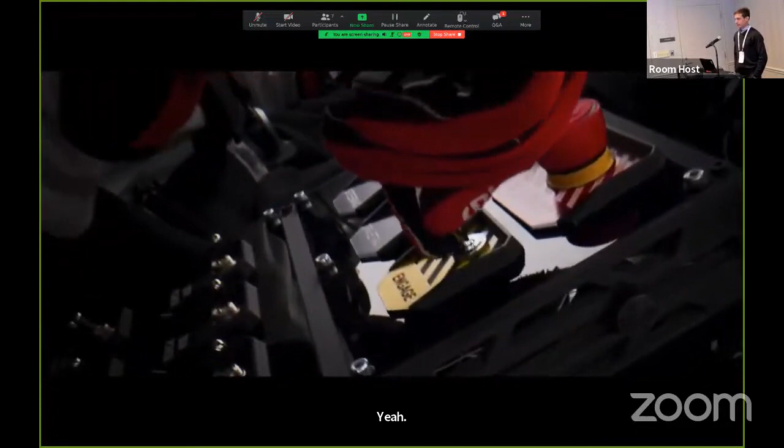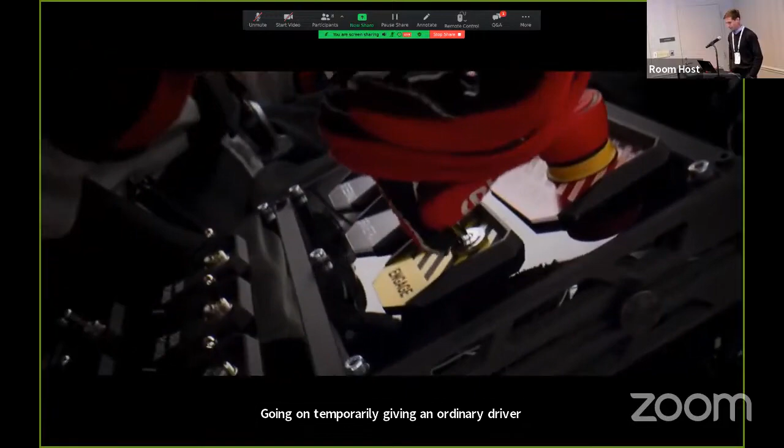John, you're good to go. Going autonomous. Whenever you're ready. Temporarily giving an ordinary driver the drifting skills of an expert. Great run.

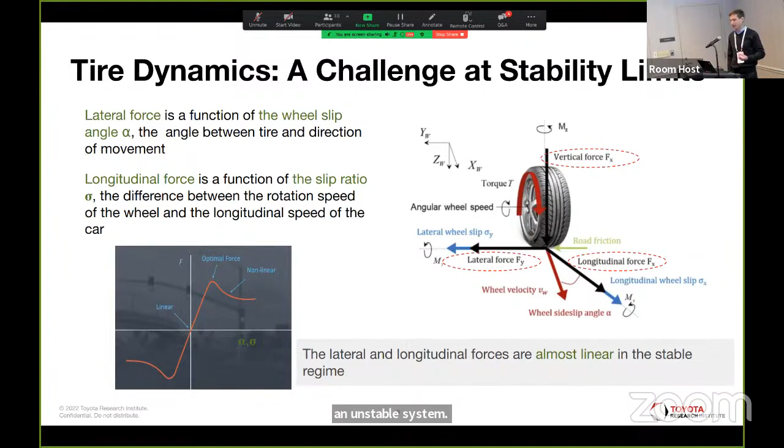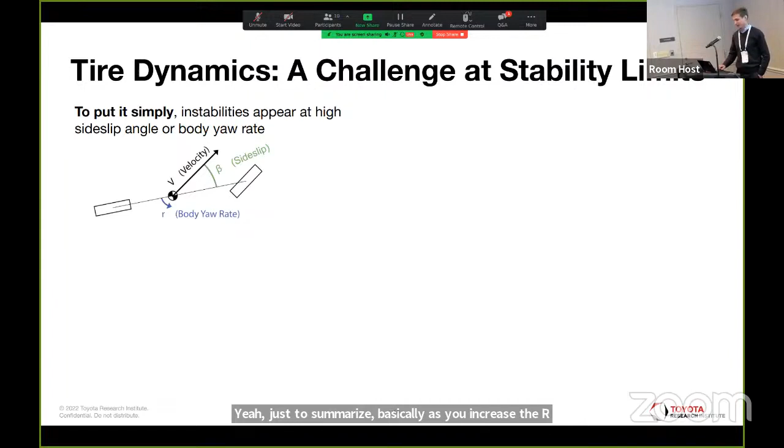But yeah, just to summarize, basically, as you increase the yaw rate of the vehicle or the side slip angle in drifting, the vehicle becomes increasingly unstable. However, it's actually quite hard to model the tire's behavior out in this regime because of a number of factors: aging and tire wear, complex coupling between the longitudinal slip, and between the suspension dynamics and the behavior of the vehicle.

So here, previously, we saw a pure slip cornering case. Here we see a purely longitudinal case. So something to think about is existing models fit the tires only, but still require all sorts of inputs from the vehicle dynamics. So these could include things like normal loads and suspension kinematics. However, in practice, when we're designing controllers for autonomous vehicles, we don't necessarily have access to all of this information.

So what this work does is effectively develop a tire model that is able to incorporate some of this information and understand how that correlates with the resulting tire forces. So in practice, what we've done here is learn a relationship between the lateral and longitudinal forces in relation to the lateral slip alpha, longitudinal slip sigma, and then the three vehicle states R, V, and beta.

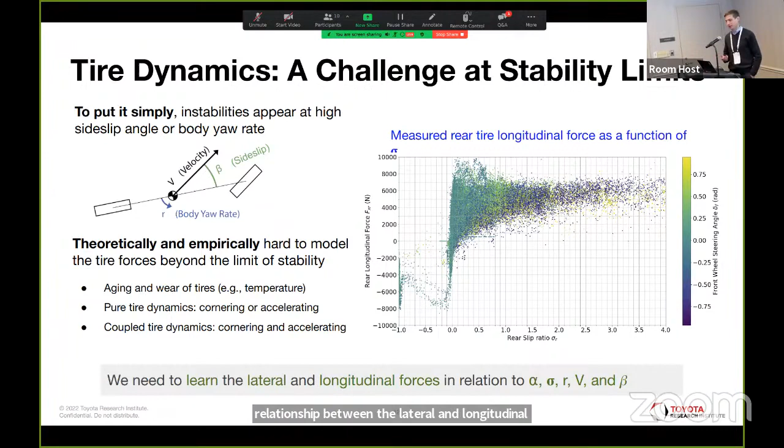So you might think that if we want to model this relationship as accurately as possible, well, we should choose a neural net and train it through supervised learning, right? It's a simple regression task. Let's build a tire model from the data we've collected, since we do, in fact, have a pretty good idea of what the tire forces are because we know the vehicle's mass and we can measure its acceleration. That looks a little something like this.

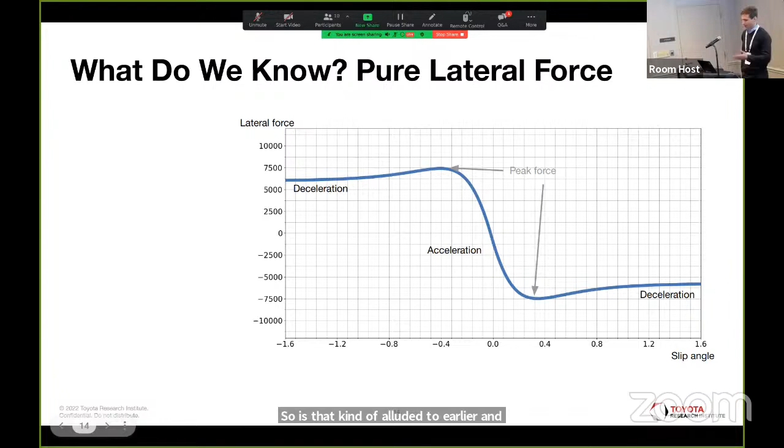Instead, we'll find a way to incorporate some of our physics knowledge and some of our empirical expectations about how tire models behave into our model. So as I alluded to earlier, and we'll touch on in a little bit more detail, what we expect in the pure lateral case, which is the simpler of the two, although the combined slip case is roughly analogous, we would expect this characteristic shape in which there's a pronounced steep peak around the origin, and then these plateau-esque regions.

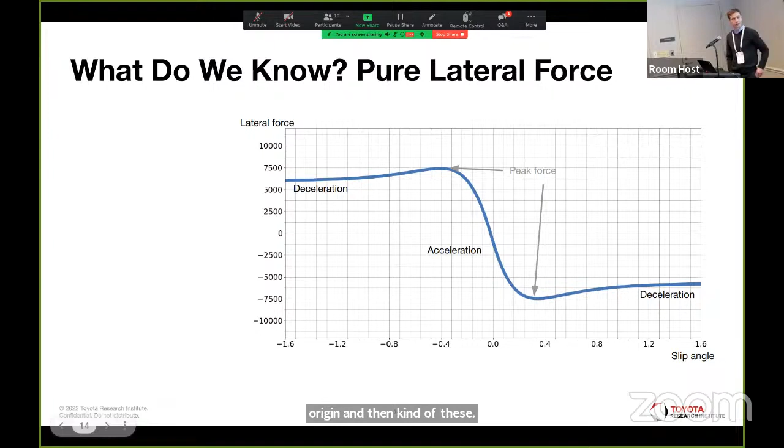So to make this a little bit more formal mathematically, what you effectively would expect is some sort of convex shape at the extreme negative slip, concave shape transitioning to a convex shape around zero slip, followed by a concave shape at very high positive slip ratios. So effectively, we're tracing the tire curve from left to right.

One other useful feature might be the ability to control the peak height. So we want a tire model that fits the data well, but at the same time, we want one with the lowest possible peak force estimate. So this allows us to be conservative in estimating the tire's capabilities based on the data we've seen.

Okay, so how do we actually incorporate some of that knowledge into our tire model? Well, the approach we've pursued is based on a neural ODE model. What we've done is we've used a neural network that effectively describes a function which we can then integrate twice to get our tire model.

So when we're training the neural network, we produce effectively this function g, which then we can integrate twice to get f, and then we can compute our loss function. Because of the way we've constructed and framed this, we know that the function f, our effective tire model, has the required characteristics. We can then train as you typically would in any sort of supervised loss setting. At the same time, we can also enforce two soft constraints on the peak tire forces.

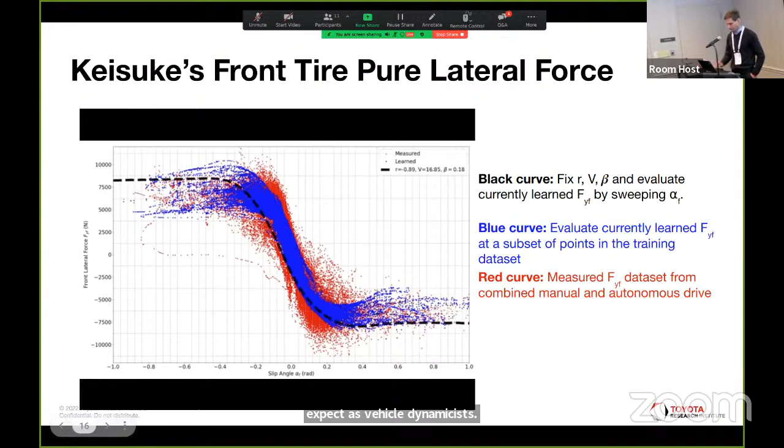All right, so this model has a lot of our desired characteristics. It's relatively data efficient, it generalizes, and if we train a distilled version, we can actually apply this on the car. However, they are somewhat difficult to tune in practice because you have to ask yourself, what should the step size be? And what range of alpha do you actually want to enforce these constraints over?

So instead, we decided to pursue another solution where we actually limit the expressivity of our model to a class of functions which we know has these desired tire characteristics. So rather than sampling from all possible functions which have these desired properties, we'll choose just one and then parameterize that with a set of neural networks. And that looks a little something like this. We've called this the exponential tanh tire model.

Here, the functional form is at the bottom, and it's dependent on these 5 parameters A. We can then learn these. In addition to this smooth curve that is helpful for our optimization algorithms, we can also directly intuit the maximum and minimum of the tire model, which is very useful in predicting the vehicle's limits.

Then, to leverage the data that we have to fit these models effectively and keep that model accurate as the vehicle is operating over its full state space, we make these parameters A functions of a neural network. Again, just as we saw in the neural ODE case, the inputs to the model are our 3 vehicle states. As before, the supervised learning problem looks quite similar. Over our data set, we want to minimize the loss, that is the prediction accuracy of our tire model. And at the same time, we want to be able to enforce some prior belief we have on what the peak tire force is.

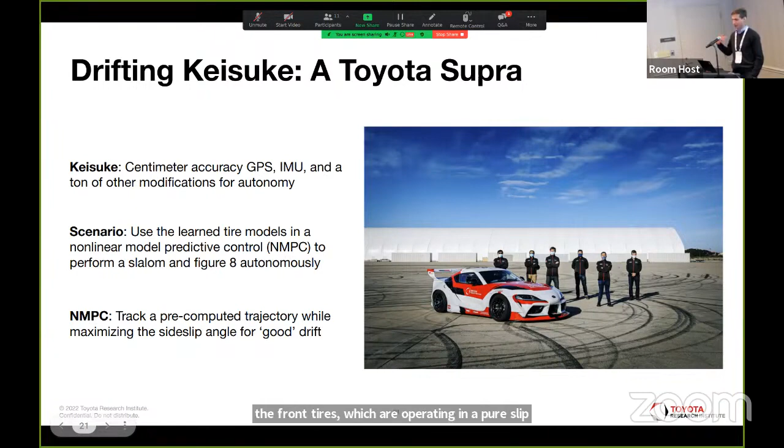In the following tests, we'll effectively do a direct swap for the tire model within our vehicle dynamics model. So the Fiala model will come out, and the two learned models will go in instead. And this will be used both for the front tires, which are operating in a pure slip condition, and the rear tires, which are operating in this complex coupled slip regime while drifting. Then we'll run some back-to-back tests. So this data here actually shows the same trajectory we saw in the opening video from my talk.

As you can compare, the top plot here is the lateral error, so effectively how well we're tracking our desired path. You can see that the Fiala model in orange generally, the worst case average deviation is 2 meters. However, the two learned neural networks actually do substantially better in this regard. This is important because, as a controls engineer, one of the first things you want to be able to do, even when driving at the limits, is put the car where you want it.

Maybe less apparent than in the path tracking, but the next plot down shows our side slip tracking accuracy, so how well we're able to control the degree to which the car gets sideways. And then the third plot shows probably the most important qualitative quantity when you're operating the vehicle, and that's the smoothness of steering. So we want to be able to produce steering commands that we can reliably track with our servo mechanisms on the actual hardware. So anything we can do to slow that down improves our low-level tracking performance and shows a degree of finesse and control in the vehicle.

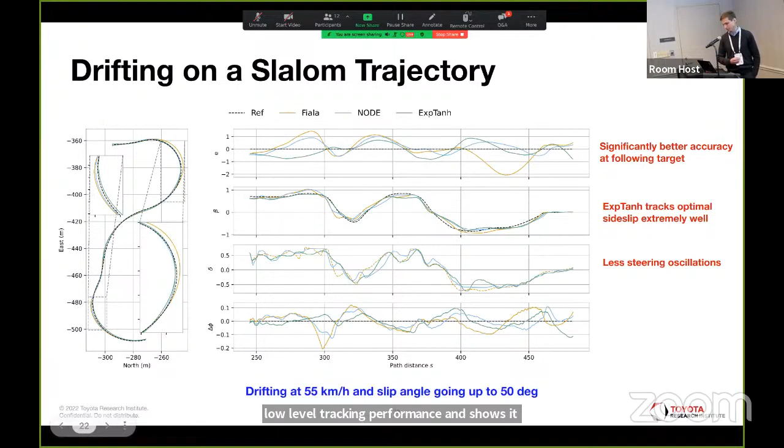However, due to the model-based nature of our control, we don't just learn models that work well in one scenario. By its very nature, the nonlinear model predictive control framework transitions well to different scenarios. So here, we'll see how it performs on a figure-8 trajectory. I also like this video because it really drives home the idea of transitioning rapidly from drift to the left and to the right.

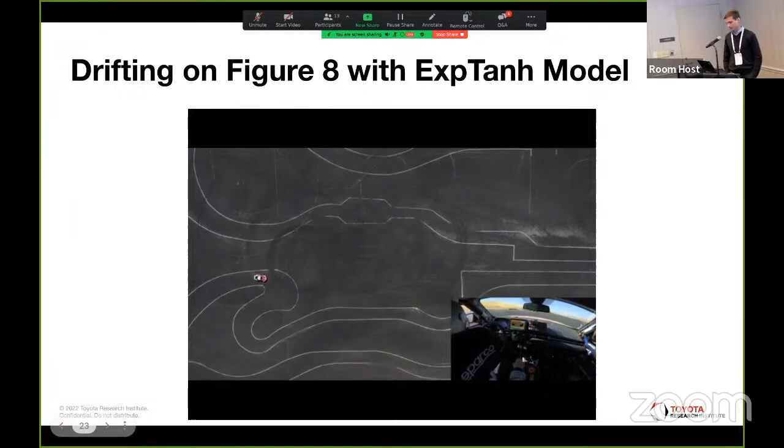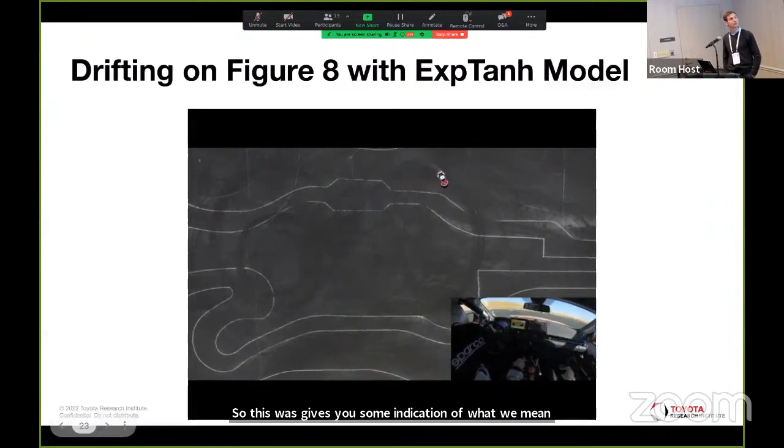If you look closely, you may be able to note the tire marks made by the vehicle over repeated tests. So this gives you some indication of what we mean when we talk about path tracking accuracy. Note, however, that there is more than one figure-8 drawn on the skid pad.

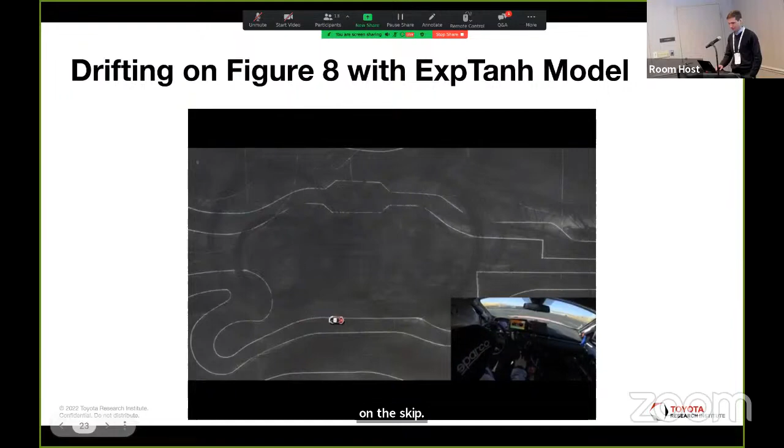So perhaps even more apparent in the figure-8 data than in the slalom trajectory we saw in the previous example, our learned exponential tanh tire model significantly improves the lateral tracking accuracy. So whereas there's a persistent offset in the Fiala model's experiments, that is effectively much reduced when we're working with the exponential tanh model.

Similarly, when we're operating in the tricky coupled slip region, so this is actually at the end of the test, we're exiting drift and returning to straight ahead driving. We can predict the states more accurately, leading to smoother steering inputs and better side slip tracking over this part of the trajectory.

Finally, an additional benefit to using these more accurate tire models for control is that when we make the rapid transitions from drifts to the left and right and vice versa in the figure 8, we see less overshoot in the side slip response. This is important because this is actually the region in this trajectory, at least, when you're most likely to spin out. So anything you can do to predict this behavior accurately means that you can transition to your new target point quickly and safely.

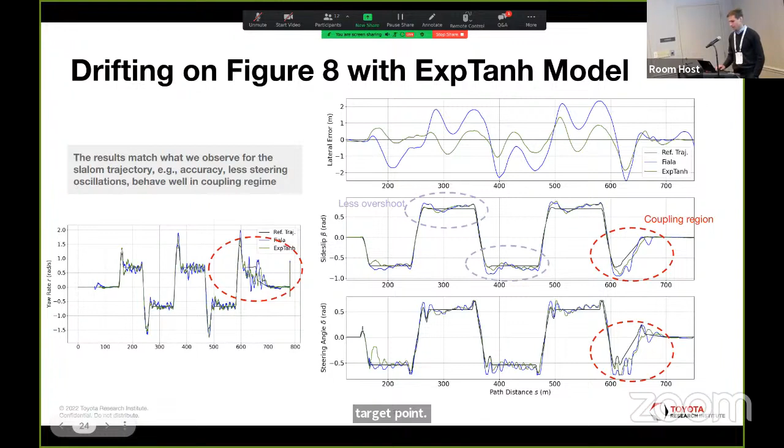Okay, so that will kind of conclude the sampling of the drift work that I want to present and kind of wraps up how we've used some machine learning techniques in actual on-vehicle control with real hardware. Now I'm going to change gears a little bit and talk some about some of our work for driver modeling for motorsports. And I'd like to recognize my collaborators on this work, Jenna Lee, Sean Manuel, and Paul Tylkin.

All right, so to begin with the question, what do we mean when we talk about driver modeling? Well, our goal here is to predict how a human driver will react and drive in a given situation. However, this situation could be problem specific. So for example, if we're modeling a racing driver in the context of racing, some things we might want would be, as human drivers do, we want to be able to drive the vehicle very near its absolute performance potential.

So we need to be able to extract everything out of the tires, kind of as I described in the previous work. However, importantly for this work, since the goal was to use these driver models to actually help optimize vehicle setup in simulation, the driver model needs to be able to adapt its driving to changes in the vehicle setup. So as the vehicle's limits change, the policy needs to adapt in such a way that it's still able to get the best performance out of the vehicle.

Finally, two other requirements are that one, we may want to be able to emulate the specific style of a driver, at least when we have demonstrations of their driving available. However, an additional requirement that was given to us at the same time was that we still need a driver model that performs well when no such demonstrations are available.

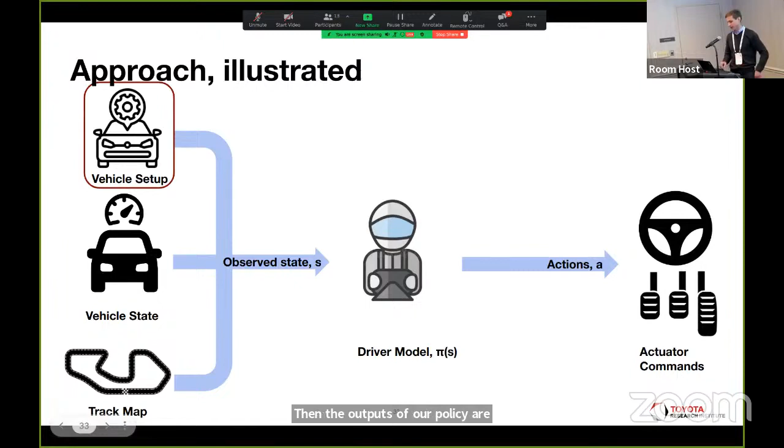Really quickly, I'd like to introduce two notions of imitation when we talk about imitating human drivers. The first would be taking the same action as a human driver was observed to in a given state. And we found that we can actually do this pretty easily by augmenting the policy update with a simple behavioral cloning loss. Perhaps more important, especially as the vehicle setup changes, is that we want to be able to visit the same states. However, we can't use all states for this, because as the vehicle's performance limits change, you may use the same racing line, but you may have to drive faster or slower to get the best performance out of the car.

So in this case, the incentive was really just to use the same racing line. And we found empirically that the second goal actually helps us improve lap time slightly, as we'll see in the following example, while the first goal had a small negative impact on lap time.

All right, to bring me to the experimental results of this work, what we did was we just devised a kind of a battery of 4 different tests. So each of these are a high fidelity multi-body simulation model of the Lexus RCF GT3 car driven around Fuji Speedway. We gave these 4 setups to a professional human driver and had them set the best time they could in a motion simulator. So high fidelity motion base, surround screen, all that good stuff.

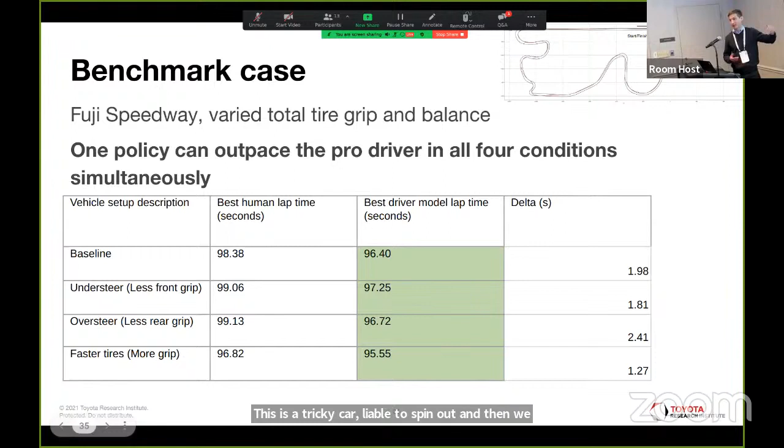So this next couple plots, we'll see how the agent actually adapts its driving to these various setups. And maybe for context, let me just give you a little bit more on how these setups were devised. So we have a baseline, and then an understeer setup where you'll have effectively less peak tire front grip. So this is a stable car, easy to drive, but not as fast. Oversteer, where you have less rear grip. This is a tricky car, liable to spin out. And then we effectively have just the baseline setup, but with an equal increase in grip compared to each of the 2 cases.

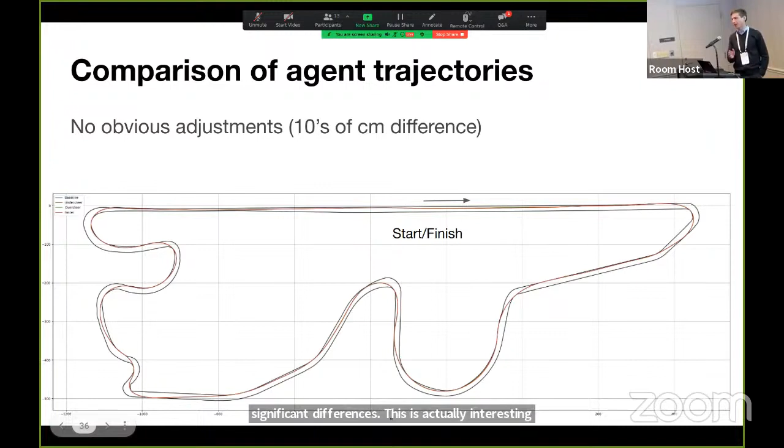So comparing the 4 trajectories, we don't see significant differences across the whole lap. So this is actually interesting, and I think, depending on who you ask, may or may not be consistent with what human drivers do. I think more interestingly is that most of the difference in lap time actually comes from differences in the driven speed. And importantly, for the use of consistent exploitation of the vehicle's performance potential, we found that these speed traces don't really cross. When you're driving the setup that we expect to be fastest, because it has the most grip, it is in fact fastest everywhere.

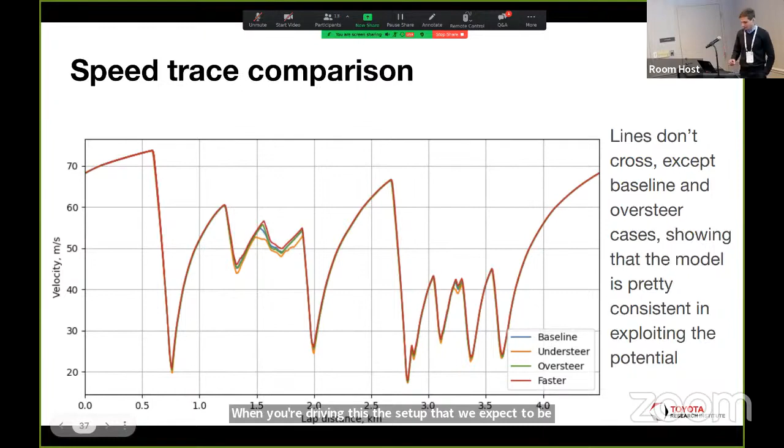Similarly, much like human drivers, the steering inputs that are actually made to the car differ. So in green, we see the oversteer case, and we see these necessary corrections that are used to maintain directional stability of the car. They're here. These are these kind of downward spikes as the driver model straightens the wheel to avoid a spin out.

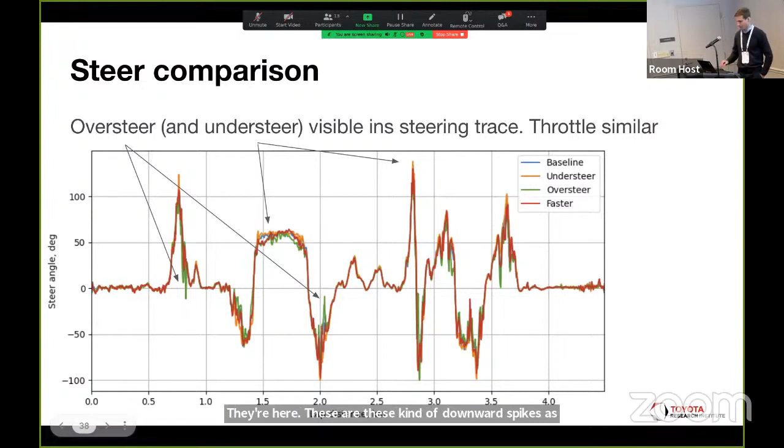Okay, so I'll conclude with a video. This is a simple animation of the trajectories driven by the human driver and by the driver model in two settings. So the human is in green, you'll see a population of their laps, and then you'll see in blue our RL agent that was trained without any knowledge of the human behavior. On top of that, you'll see a red agent, which is, in addition to the cost function I described earlier, incentivized to use a racing line close to the average of the human demonstrations.

This is playing in real time, so the lap time is about 1.5 minutes. So as you come down the main straightaway at Fuji, it's one of the longest in the world from what I understand. You brake for the first corner, and you can already see slight differences in the racing line used by the human and the various agents.

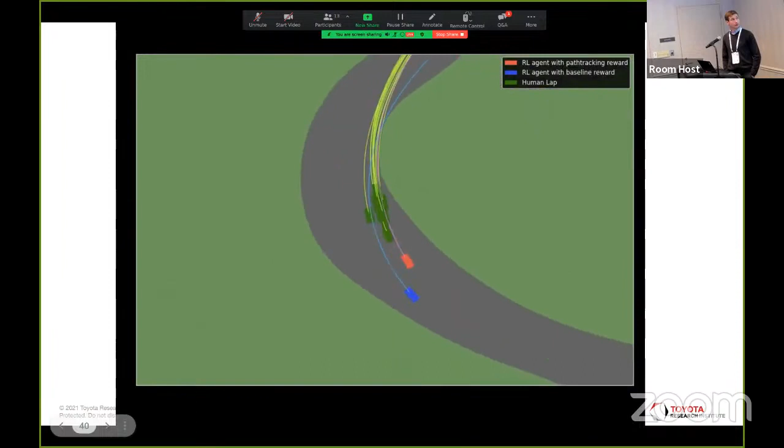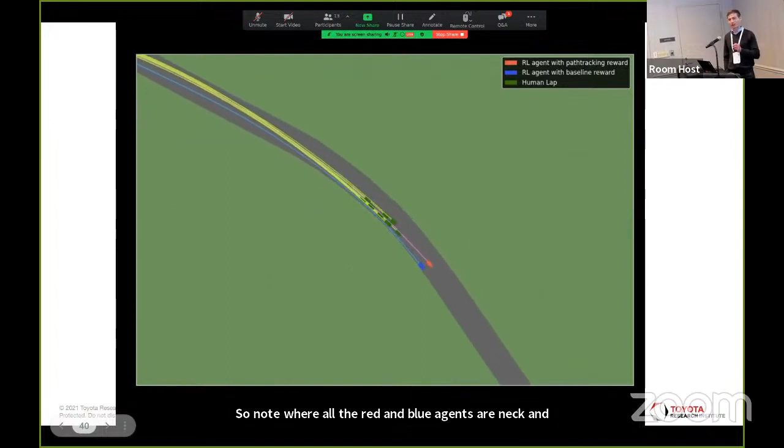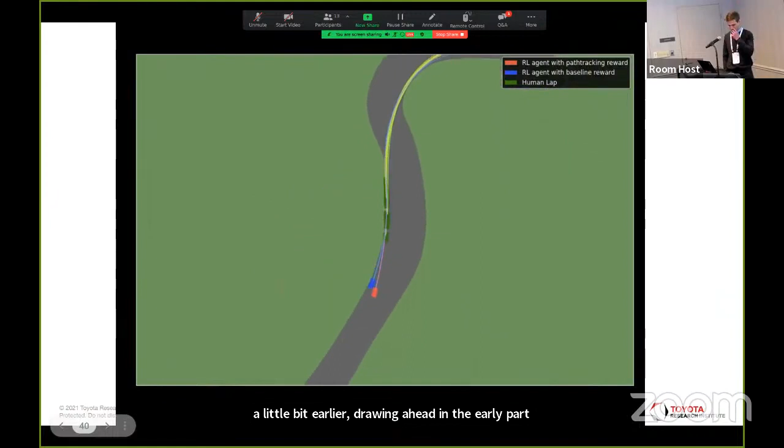So note while the red and blue agents are neck and neck at this point, they generally take different approaches to each corner, with the blue agent diving in a little bit earlier, drawing ahead in the early part of the trajectory, only to give most of that gain back in the latter part of the corner. Note too how the path of the red agent is pretty close to the center of the human lap distribution.

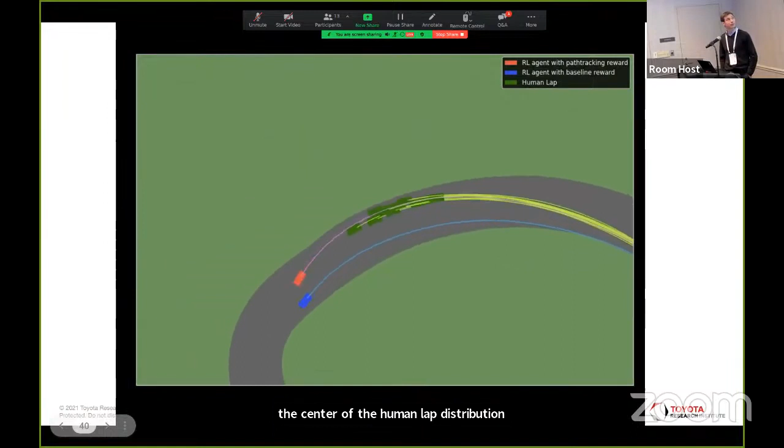We're coming into the last corner, blue is ahead, but red takes the day with superior exit speed onto the final straight.

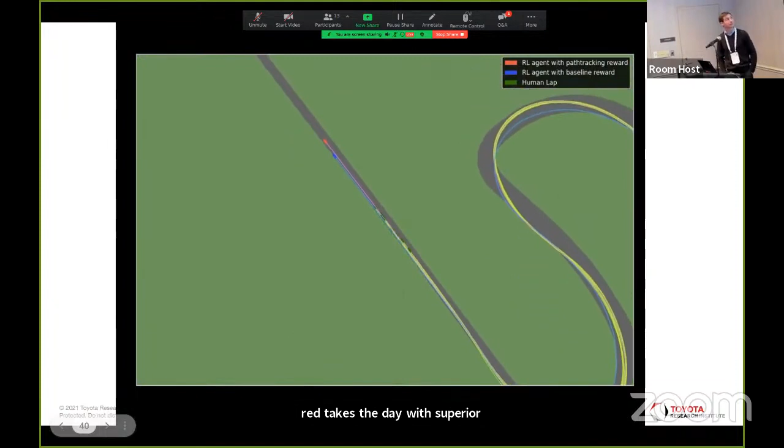So I think what we can take away from this is that humans, as impressive as what the RL agent can do in terms of vehicle control, humans really do have better insight into what it means to take the best racing lines.

I will acknowledge here quickly that there could be a few things the RL agent is exploiting. Since this is simulation, where human drivers are very good, it is not the same as the real world environment where they spend most of their time. So our agent could be exploiting something that the human driver isn't willing to do in the real world, and so is therefore not willing to do in the sim.

Okay, I'd like to conclude my talk with just two final thoughts for you. The first is that whether through model-based control, as we saw in the MPC work, or the model-free reinforcement learning, ML has a lot to offer us in the study of high-performance driving. However, we've found, whether through incorporating side information into the tire model or human demonstrations into the driver model, incorporating expert knowledge is in fact key to getting the best results.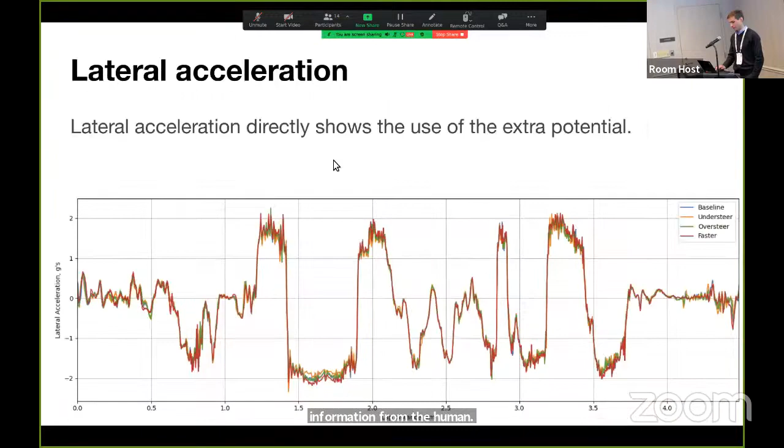Yeah, thanks for the talk, John. I forget if it was the red or the blue that incorporated the racing line information from the human. Are there any other ways that you've been looking at incorporating information from what the human did? For example, I assume that doesn't have the velocity information or the steering information. It's just the trajectory, is that right? And is that generally the best thing?

Is that generally the biggest help we can give the model, or are there other aspects we can give? And just to follow up, did that help training time? Was it fewer iterations to get to a good policy with the hint of what constitutes good racing?

Yeah, two fantastic questions. I'll start with the second because it's slightly easier to answer. Yes, we found it did improve training performance to get to a certain level. However, at best this is somewhat less than a factor of 2 improvement. So it wasn't necessarily a tenfold increase.

In terms of future explorations, if we were to continue heavily with this work, other things we might look at incorporating: we've looked with some success at incentivizing exploration around the human trajectories, even very simple potential-based reward shaping. We have some initial experiments that suggest this works well when you have at least one human demonstration. You don't necessarily get the behavior we observed where the agent will follow the human racing line, but where it's beneficial, it does leverage that.

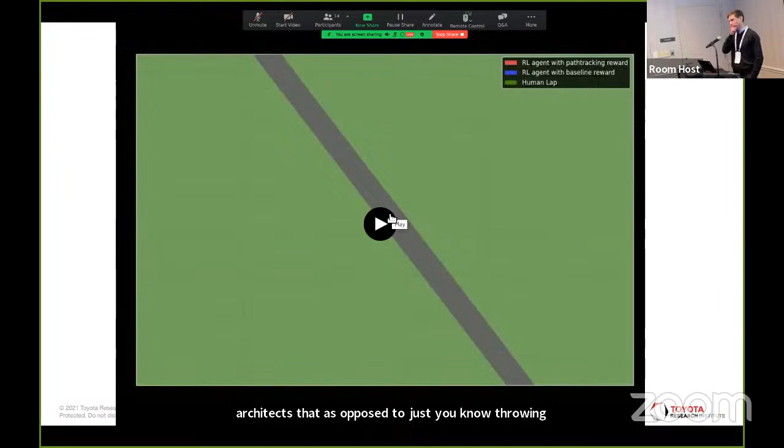Yeah, and related to that, beyond the humans themselves, is there any other kind of priors we can put in? So in the first part of your talk, you were talking about these neural ODEs, that the way in which you architect that, as opposed to just throwing a fully connected network at it, really helped it out. Beyond second order ODEs, is there any other interesting prior information, again, not necessarily to do with human racing, but more to do with physics, that could help out the training?

Yeah, I think I'll answer the question in 2 parts. I think we have a pretty good idea from vehicle dynamics about how to select the state information to make available to the agent. At the same time, part of the interesting part that we don't necessarily get to leverage on the drift car is that we have much better knowledge of how the simulation functions. So if the goal is to operate at the tire peaks, that information is actually available to us in the sim. We know exactly where that information is. So if we want to design an agent that can adapt broadly or in very few attempts to a new setting, it might be possible to leverage some of that ground truth information about tire saturation.